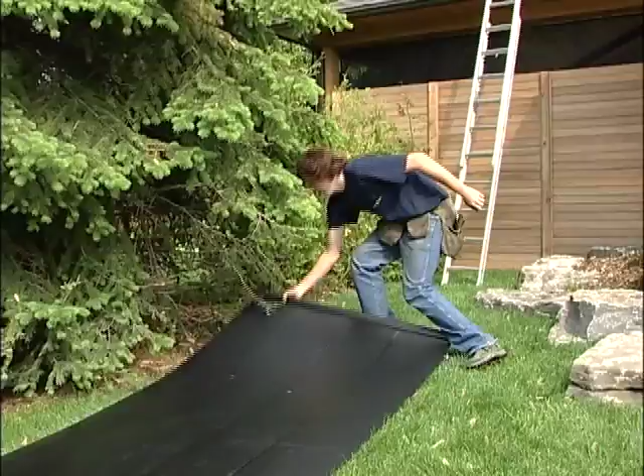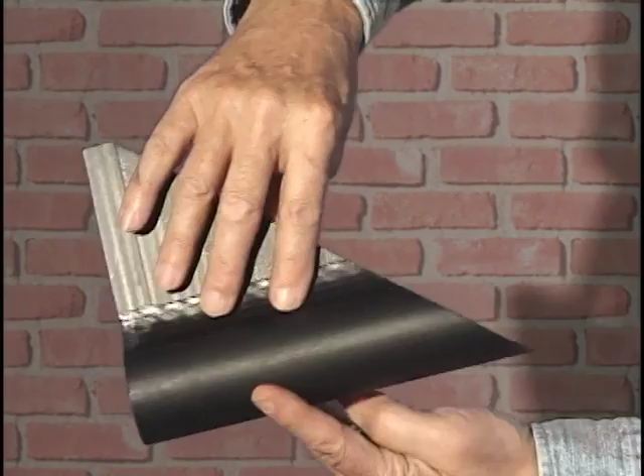The Techno-Solis solar pool heating system includes three basic components. First, the Techno-Solis solar panels, which are the key components of the solar pool heating system. They absorb solar energy effectively and transfer this energy to the pool water circulating inside. They are made of a 1/4 inch thick polypropylene sheet with 104 internal channels. The absorber is welded to two pipes made of the same material, the headers.

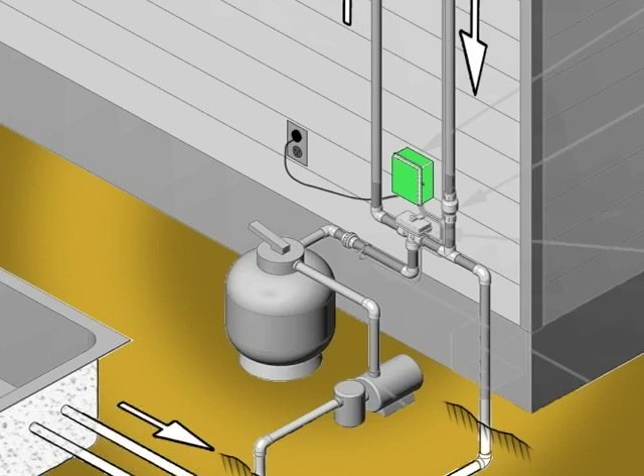Second, the automatic control compares pool water temperature to the ambient temperature on the roof near the solar panels. It will turn the solar pool heating system on or off depending on the availability of solar energy. The solar pool heating system operates with either an automatic or manual control. And third, the existing pump and filter, which enable the filtered water to circulate in the solar panels.

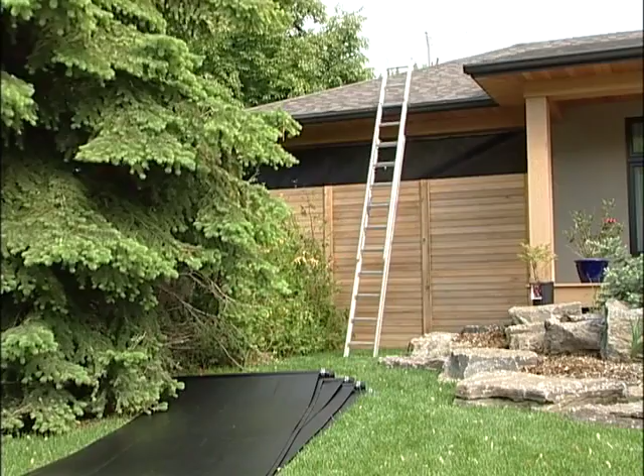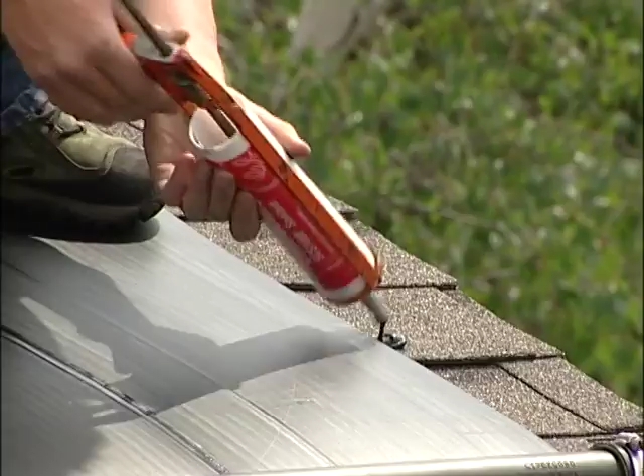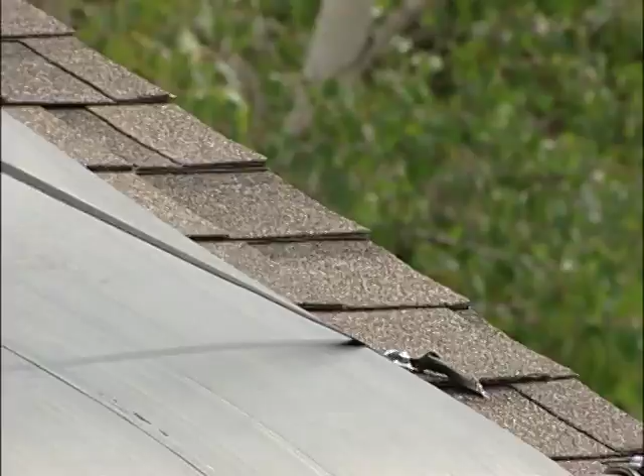Here are the tools and accessories needed to install the Techno-Solis solar pool heating system. A ladder, an elastic band to attach the ladder, a battery-powered drill, a 5/16 inch drill bit, a caulking gun, a 5/16 inch socket head screwdriver for gear clamps, a 3/8 inch socket head screwdriver for lag screws, a pipe cutter or hacksaw,

a knife, a wire stripper, a Phillips screwdriver, a level, a tape measure, pliers, a 3/16 inch concrete bit, and some Teflon.

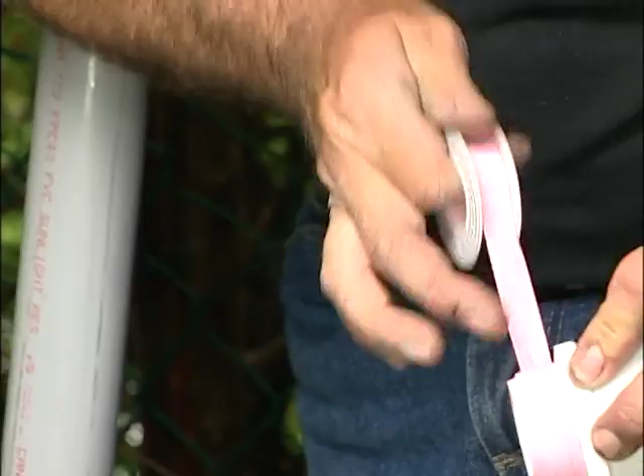Place the rough side of the solar panel's longitudinal weldings against the roof. On the ground, prior to lifting the solar panels onto the roof, install an EPDM hose and two gear clamps on the right side of the top and bottom headers of each panel. Do not over-tighten the gear clamps, as it could cause the open end of the header to collapse.

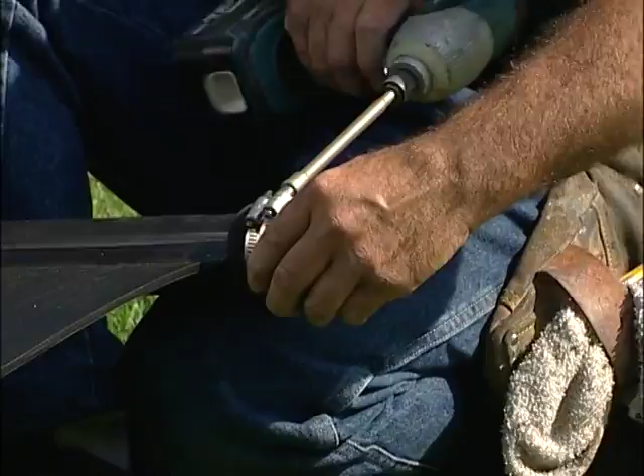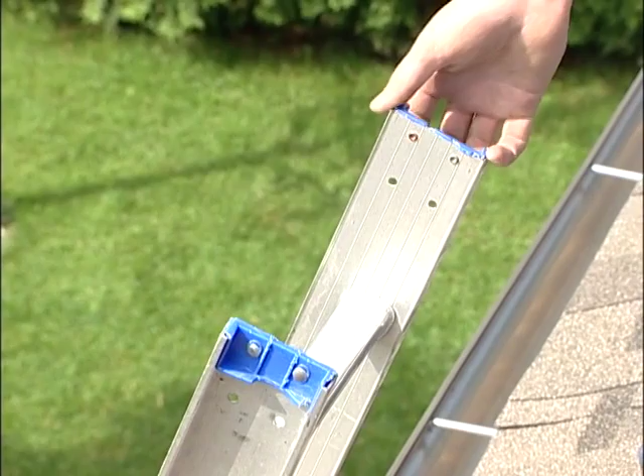Place the ladder level and secure it to the gutter with an elastic band. Although the Techno-Solis solar panels are made with a resistant plastic material, it is important to prevent all contact with sharp or cutting objects. In order to lift the panels to the roof, slide them up on the ladder.

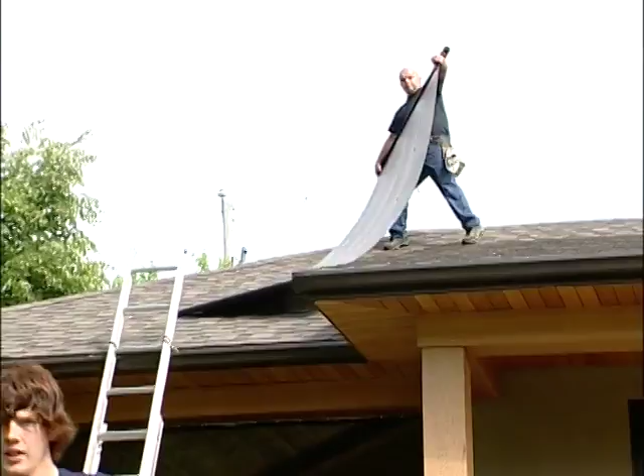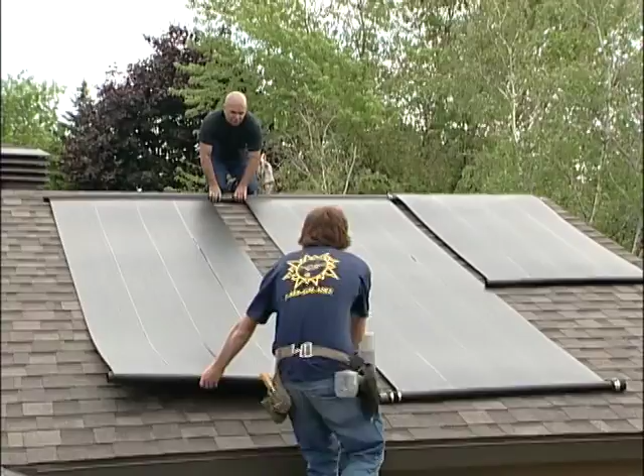Once on the roof, place panels side by side. Insert the header of the first solar panel in the EPDM hose of the second panel and tighten the gear clamp. Repeat the same procedure for the other solar panels.

Solar panels are installed on a slope, flowing downwards towards the supply pipe, therefore ensuring drainage and optimal protection against damage caused by freezing. The slope is 1 inch for 10 feet, or 25 millimeters for 3 meters. When the solar panel assembly is completed, anchor it to the roof.

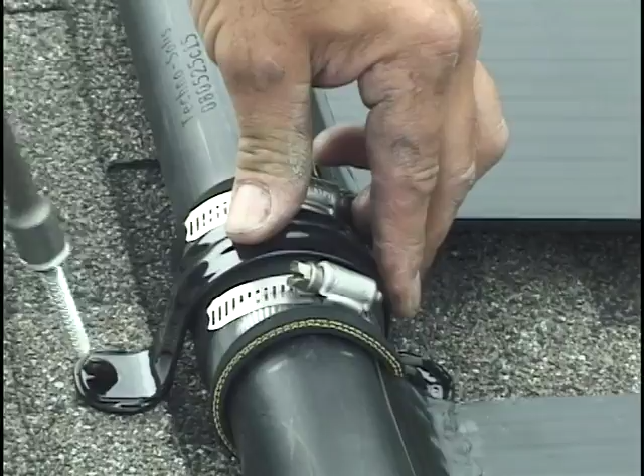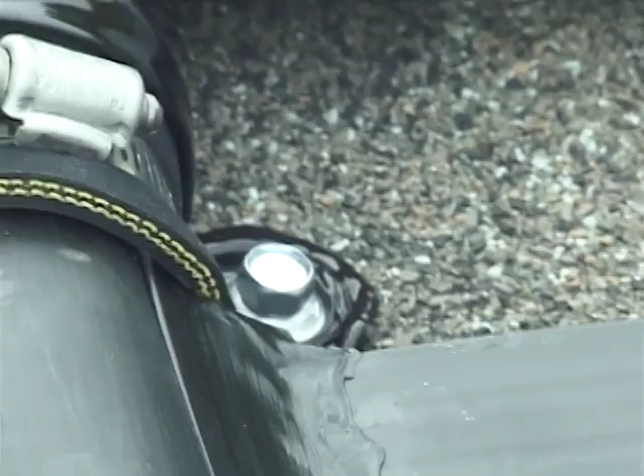Place a generous amount of caulking under the U steel supports. These supports are used to hold the solar panel's weight against slippage. Anchor the support to the roof using 2 lag screws with washers. Install a U steel support between each panel on the EPDM hose of the top header only.

Anchor all other EPDM hoses of the top header with a U steel support by repeating the same procedure. It's very important to remember, only the top header of the array is anchored to the roof.

For the 4-foot by 10-foot Techno-Solis solar panels, install 3 mounting straps horizontally. For 4-foot by 12-foot panels, 4 straps are required. These straps are used to hold the solar panels to the roof. Install a mounting strap 12 inches, or 300 millimeters, above the bottom header. The second mounting strap is installed 18 inches, or 450 millimeters, below the top header.

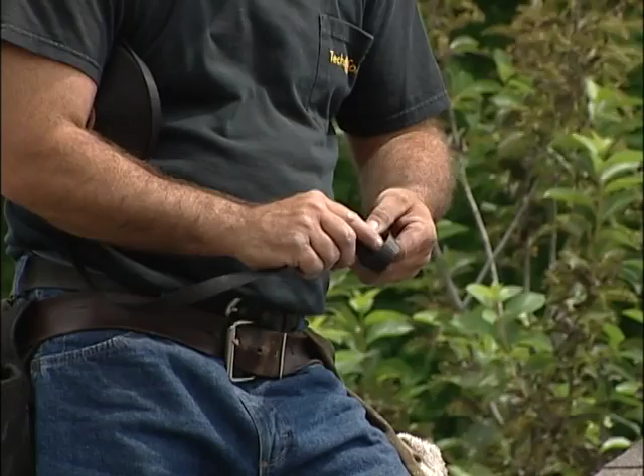The third and fourth straps, if applicable, are installed at equal distances between the 2 other straps. Make a knot at the end of the mounting strap. On either side of the solar panel array, apply a generous amount of caulking where the mounting strap is to be anchored. On one side, insert a lag screw with a washer in the strap and anchor it to the roof.

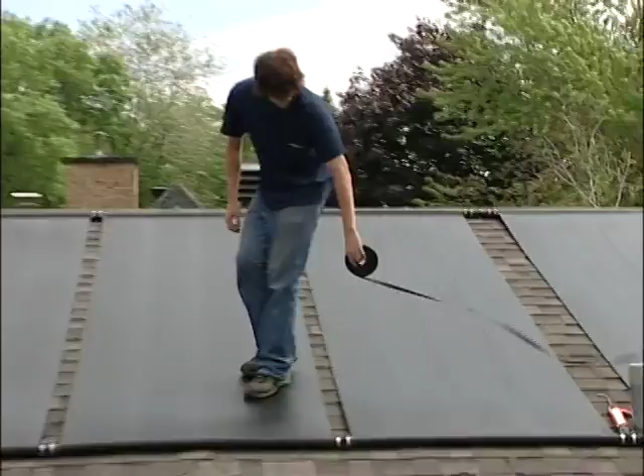Unwind the mounting strap over the solar panel array. On the other side, stretch the strap and anchor it using a lag screw with a washer. Cut the strap and make a knot on the end. Place other mounting straps using the same procedure. To anchor mounting straps between each solar panel, apply a sufficient amount of caulking and anchor them using lag screws with washers.

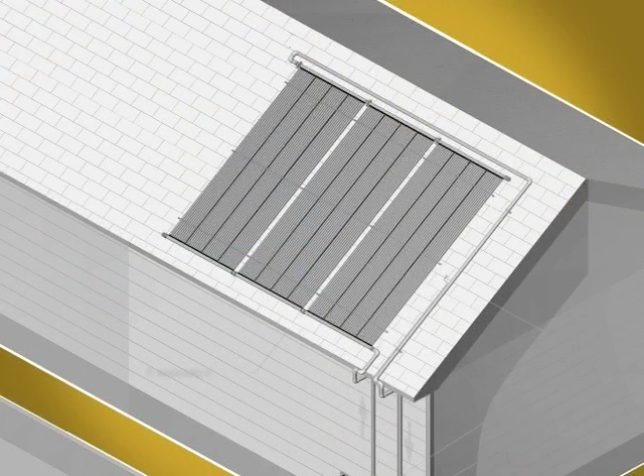Always connect the solar panel array assembly in reverse return. This assures that water flows through all the panels evenly. A feed and return on the same side of the solar panel array seriously reduces the efficiency of the system.

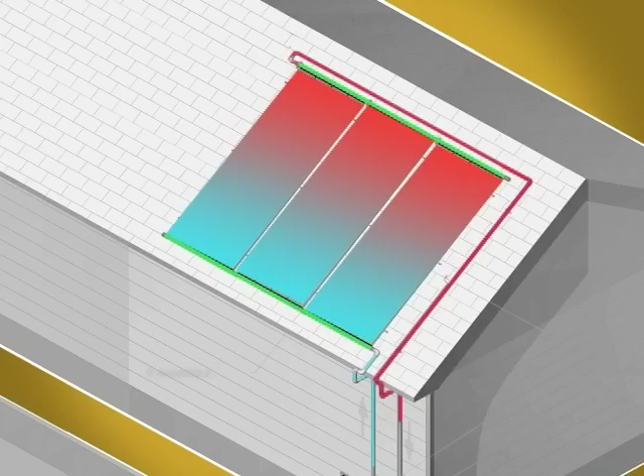Feed the water in at the lowest point in the system and connect the return line from all panels to the highest point in the system. End caps are installed on the open ends of the top and bottom headers.

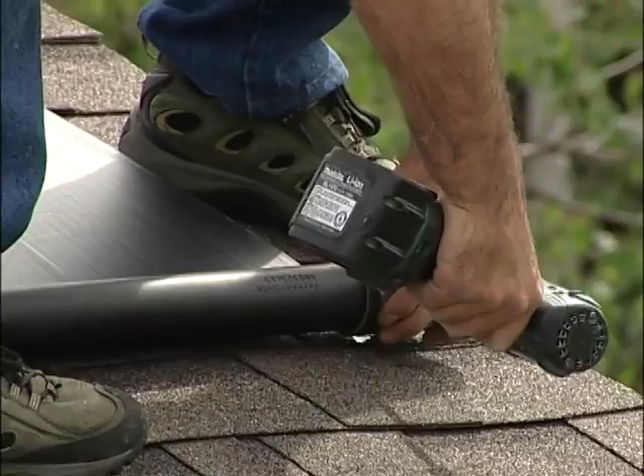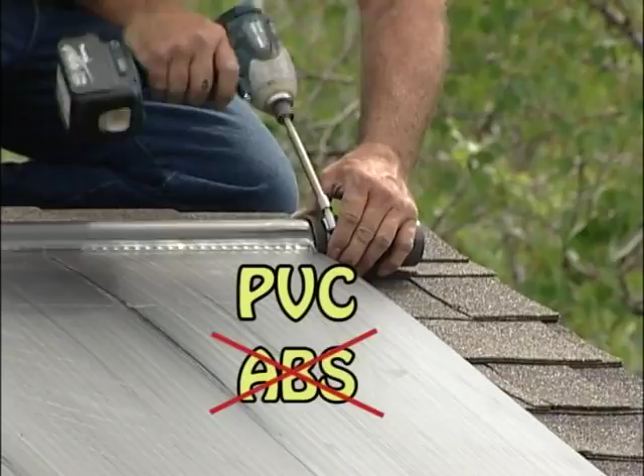The return pipe is connected to the panel array using a grooved PVC pipe-to-panel adapter. Only use PVC pipes. Black ABS piping degrades when exposed to sunlight. The feed pipe is also connected to the panel array using a grooved adapter.

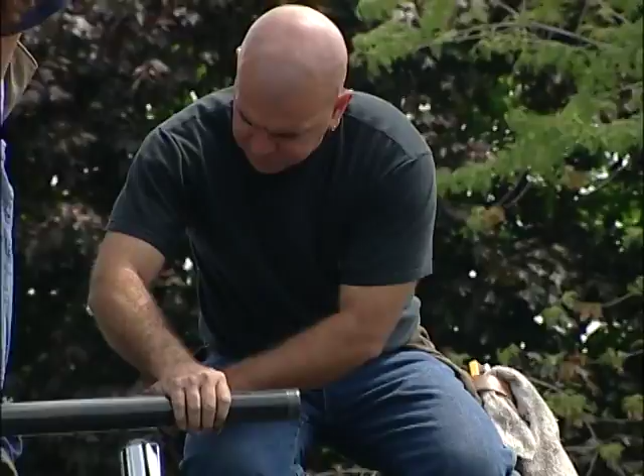Install the return pipe above the solar panel array. All pipes must be installed with a continuous slope of 1 inch for 10 feet, or 25 millimeters for 3 meters, in the direction of the filter for proper drainage when winterizing the solar pool heating system.

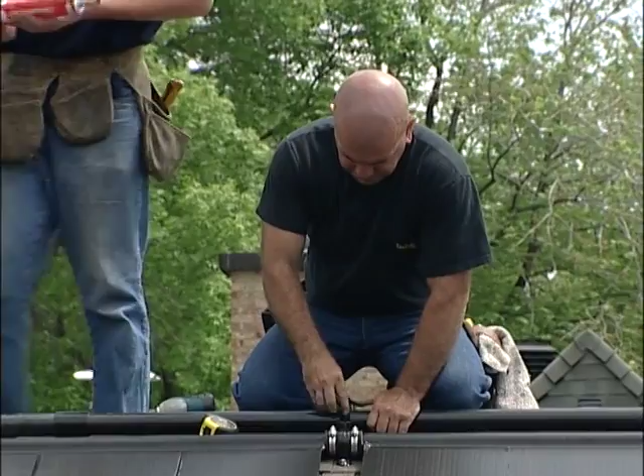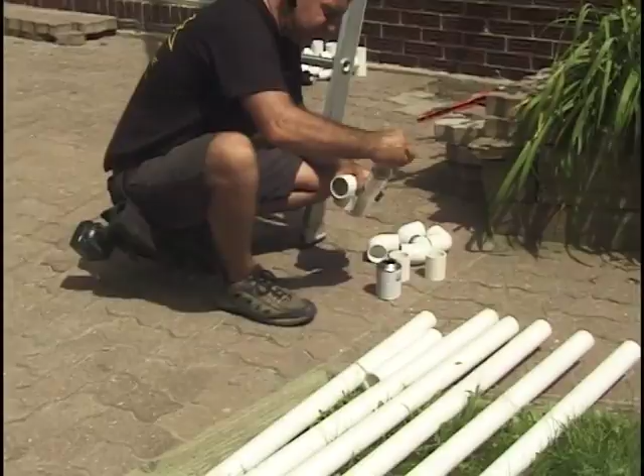Use a U steel support to hold pipes to the roof, and always apply a sufficient amount of caulking before anchoring them. Installing pipes on the wall of the house is quite simple. The solar panel's feed and return pipes are installed around the eaves rather than through the roof in order to avoid the risk of water infiltration.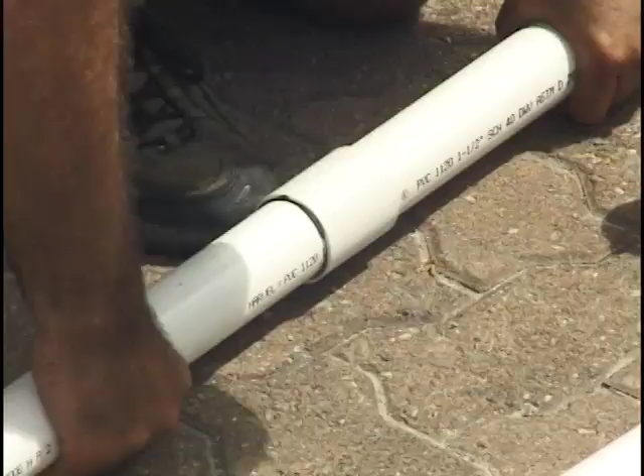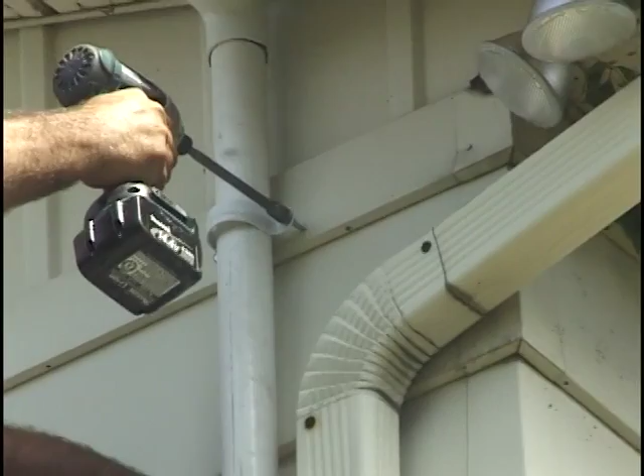Note that lettering on PVC piping is placed on the back of the pipe. During installation to the wall, lettering will not be visible. Once pipes are assembled, anchor them to the wall of the house, preferably along an existing gutter or hidden by a chimney. Use steel U-supports.

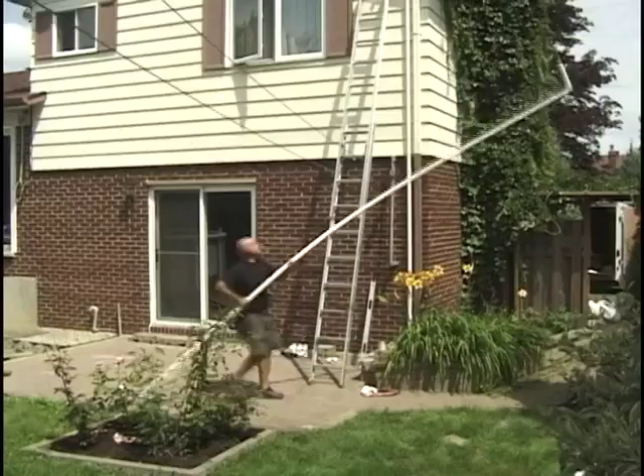Use a level to install the first pipe straight and anchor it. Install more steel supports every 5 feet, or 1.5 meters, to properly support the pipes. The second pipe will be installed parallel to the first one. Repeat the same procedure in order to anchor the supports to the other pipe. These two pipes are parallel.

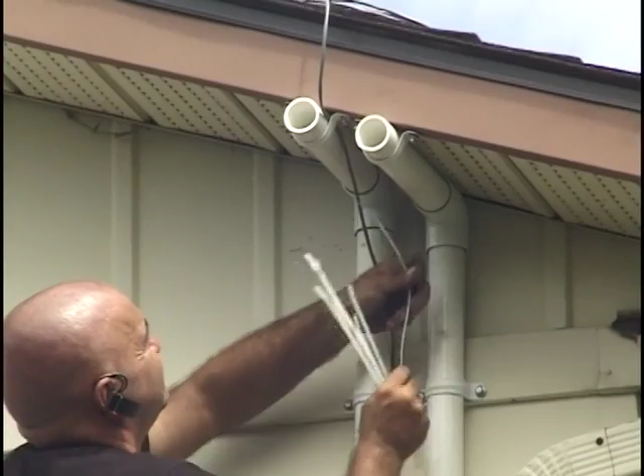On a brick wall, use a concrete bit to drill holes in order to install steel supports. Screw in the support. Run the roof sensor wire inside the pipe supports. Place excess wire on the roof. Add tie wraps to properly attach the sensor wire. Connect the roof pipes to the wall piping.

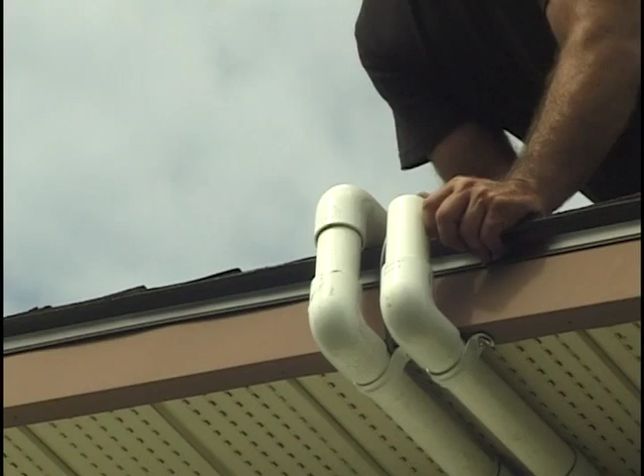Dig an 8-inch wide by 8-inch deep, or 20 centimeter by 20 centimeter, trench from the house where pipes come down from the roof and run to the filter. Mark with adhesive tape at both ends the feed pipe only. This will help avoid mixing up the pipes when connecting to the filter.

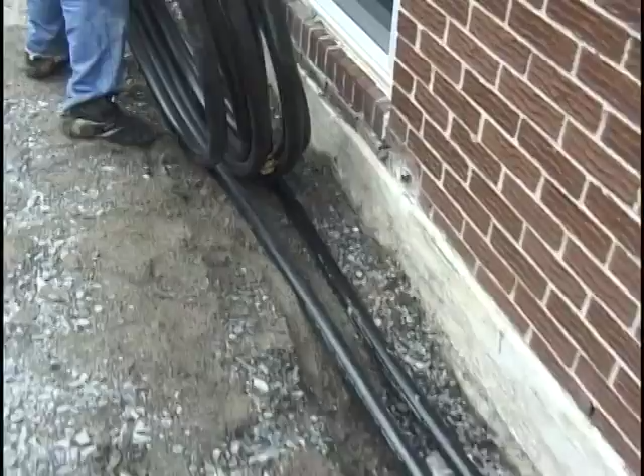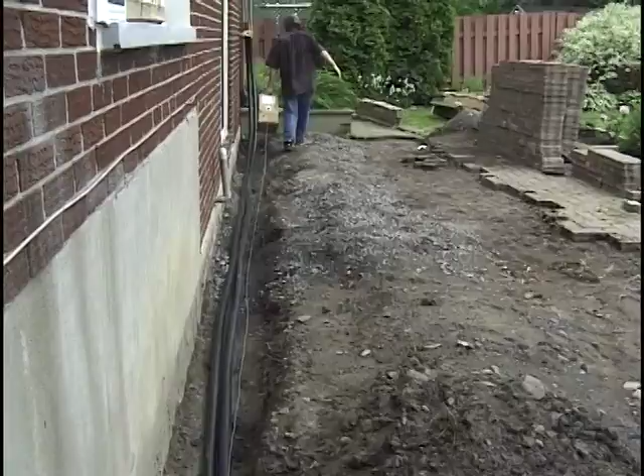For underground pipes, use flexible Corlon type pipes to connect the rigid PVC feed and return pipes of solar panels to the rigid PVC pipes around the filter. In the trench, add the wire for the roof sensor along with the 2 flexible pipes. Backfill the trench.

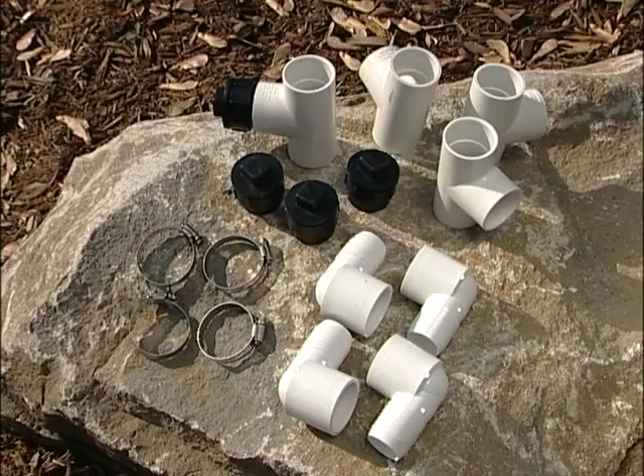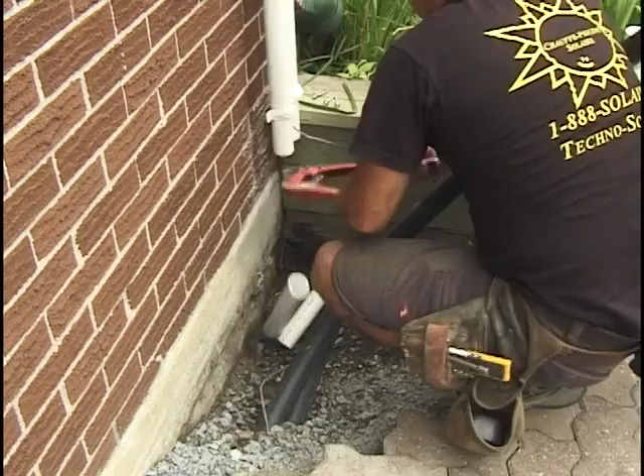An underground kit is used when the pool's pump and filter are far away from the solar pool heating system. For details on this kit, see the Assembly Kits menu. Cut the pipe to required lengths. Glue a T and use a piece of tube to properly align the T.

Connect the flexible tube to the rigid PVC tube with a 90-degree Corlon glued elbow. Tighten the gear clamp. Join the two pipes by firmly holding them for a few seconds while the glue sets.

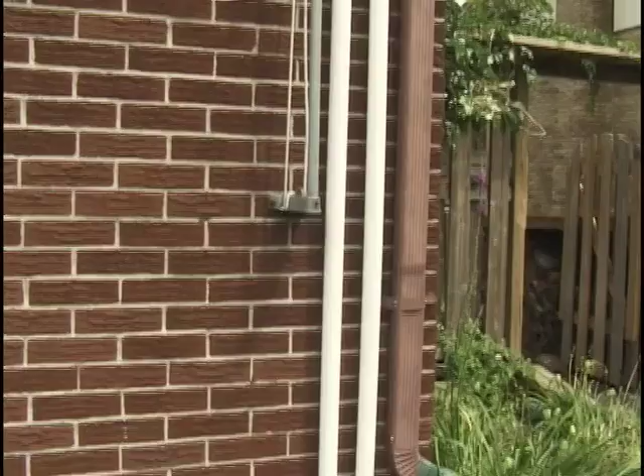Same procedure for the other pipe. Note that the adhesive marker tape is still in place. The underground pipes are ready to be backfilled. The underground kit transitions from the underground pipes to the pipes anchored on the house walls.

Determine the location where you will install the automatic control, taking into account access to the electrical power supply, accessibility for cutting the existing pipes around the filter, as well as the layout of the feed and return pipes from the solar panel array assembly. The automatic control turns the solar pool heating system on and off, depending on the solar energy available and the desired temperature of the pool water.

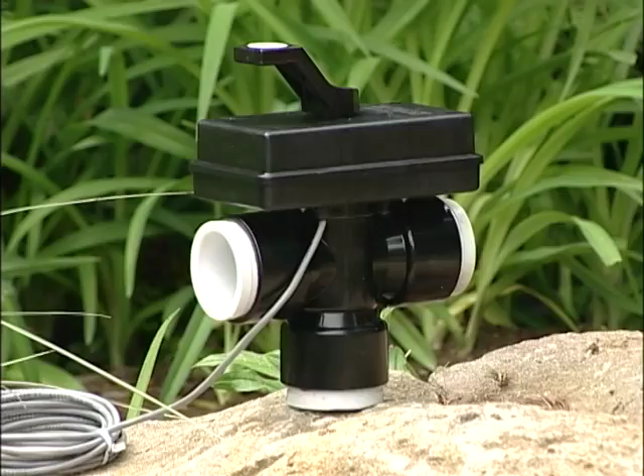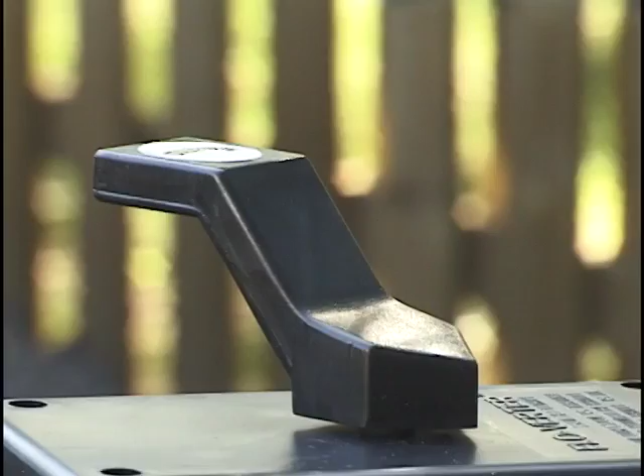The automatic control activates a three-way motorized valve which sends the water towards the solar panels or towards the pool. Install the automatic control in an area that is easily accessible, near the pump and existing pipes. The pump sucks water from the skimmer and drain of the pool. It moves the water towards the filter and returns it to the pool.

The motorized three-way valve is installed after the filter so that the water, heated by the solar panels, can return directly into the pool. Once you have determined the required space for the three-way valve, cut the required length from the existing pipes. Use a male adapter for PVC pipes. Always cover threads with Teflon tape to avoid leaks.

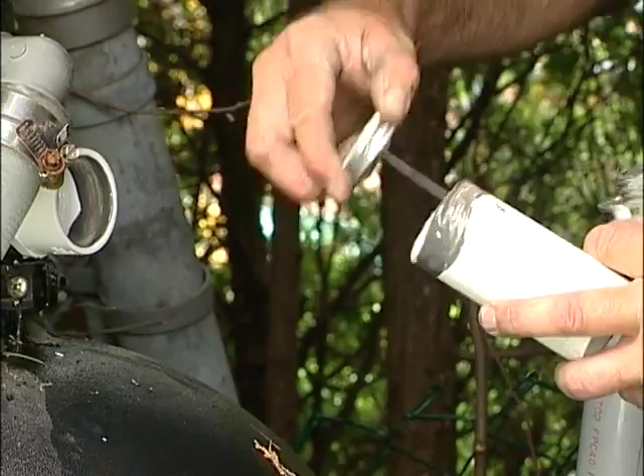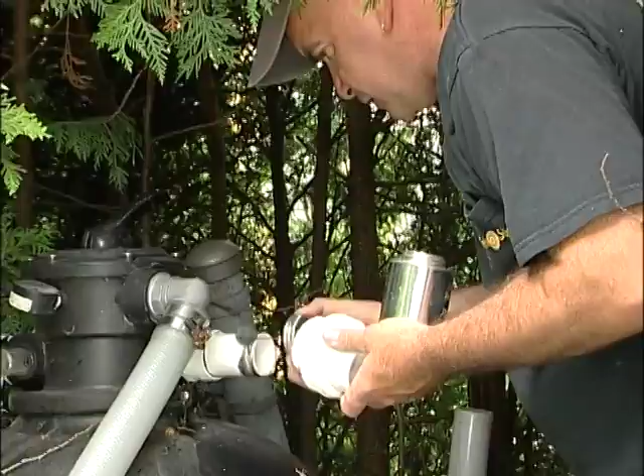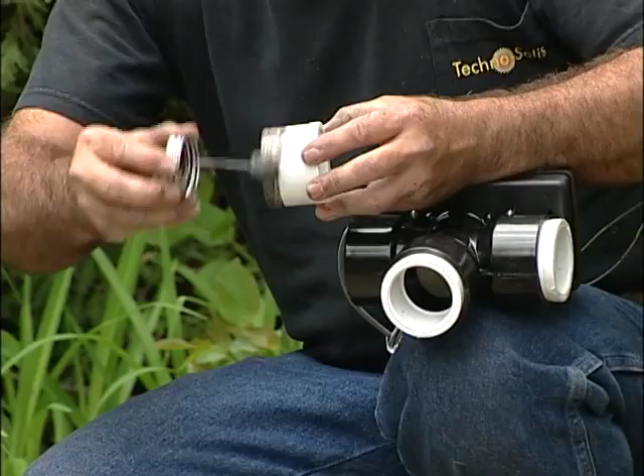Install a PVC union for ease of handling the filter's head when changing the sand. Glue the 3 PVC reducing bushings into the three-way valve. Glue the three-way valve to the filter outlet.

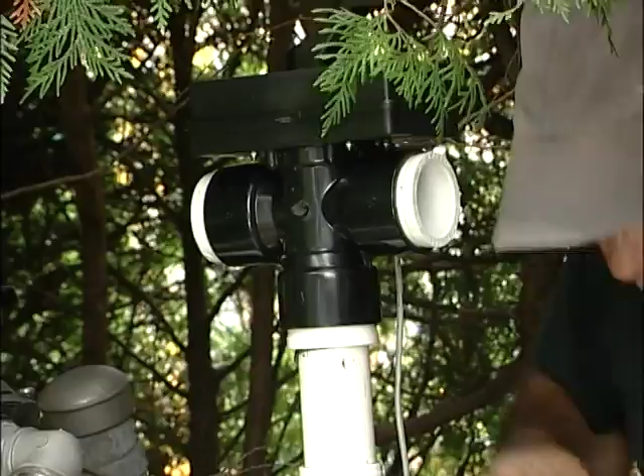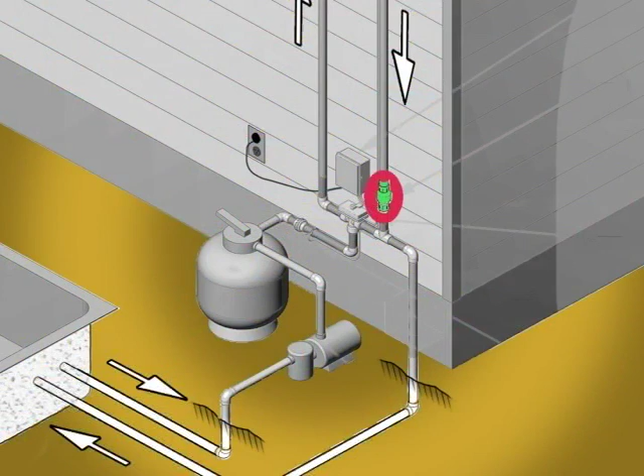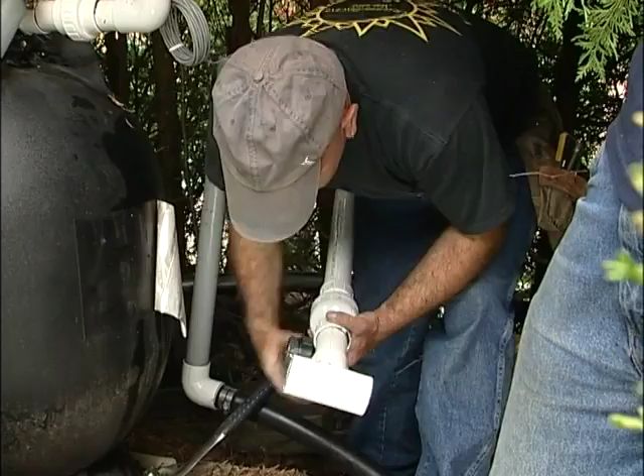When installing the check valve, drill a 1/8 inch diameter hole through the flapper inside the valve, enabling a complete drainage of the solar pool heating system for the winter season. Please note the arrow on the check valve body which indicates the direction of water circulation. Install an underground kit which includes a T and a cleanout. Glue the solar panel return pipe to the existing pipe.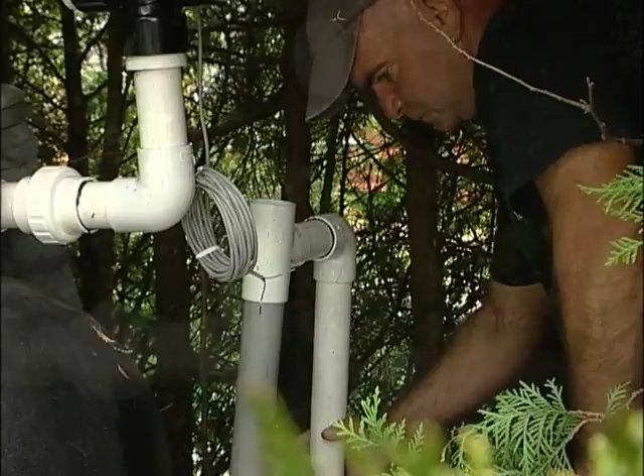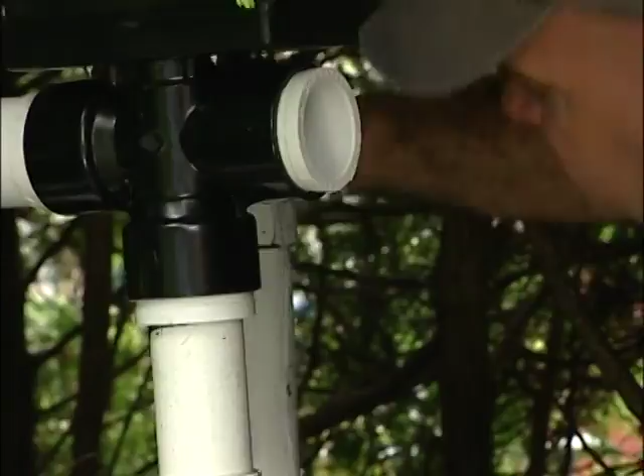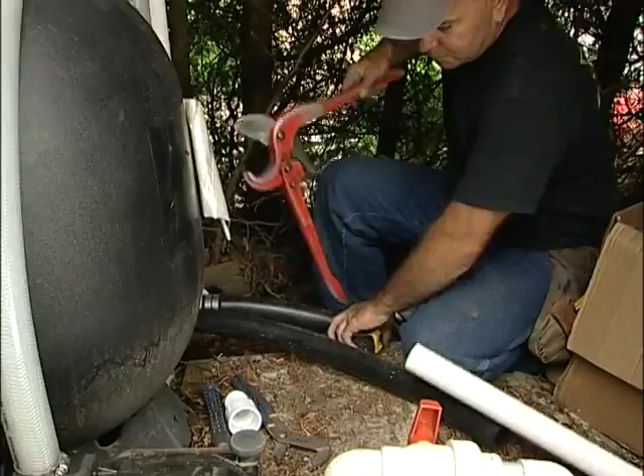Glue one side of the three-way motorized valve to the pool's return pipe. Then, connect the other side of the valve to the solar panel supply pipe. Use a butane torch for easier handling of the flexible pipes, if necessary.

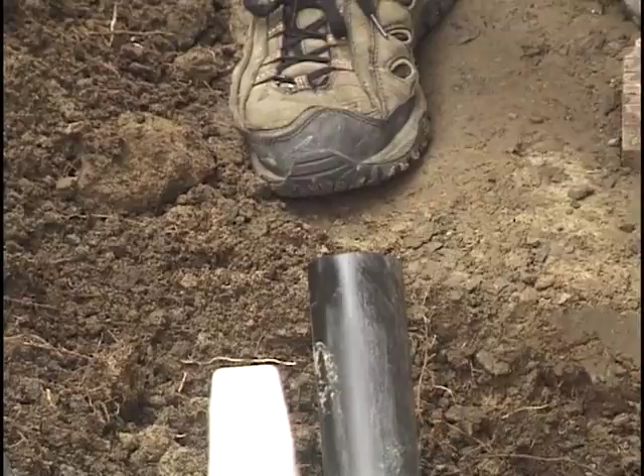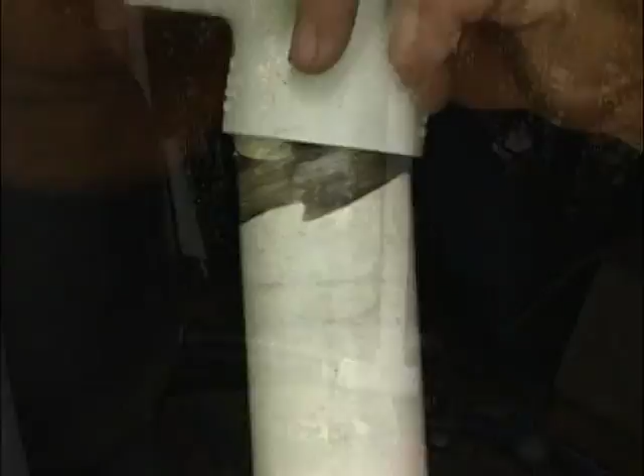Insert another Corlon PVC adapter to connect the flexible pipes to the rigid PVC pipes. Tighten the gear clamps. Glue the T and the cleanout. Finally, connect the piping to the motorized three-way valve.

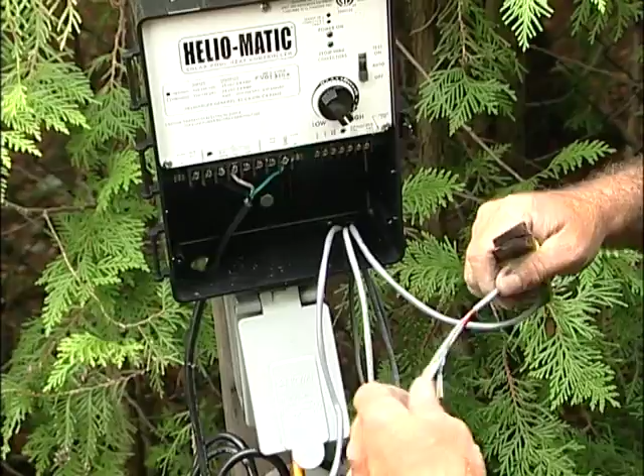Install the automatic control box on a piece of wood, on the wall of a garden shed or on a fence post, near an electrical power supply outlet. The control box is waterproof and weather resistant. Use number 218 shielded wire for all connections. Connect the roof's sensor wire to the automatic control. Connect the pool's sensor wire to the automatic control.

Connect the three-way motorized valve to the automatic control. Follow the color coding specified on the control panel. Reverse red and green colored wires to change the motorized valve's logic if necessary. All electrical connections are completed at the automatic control.

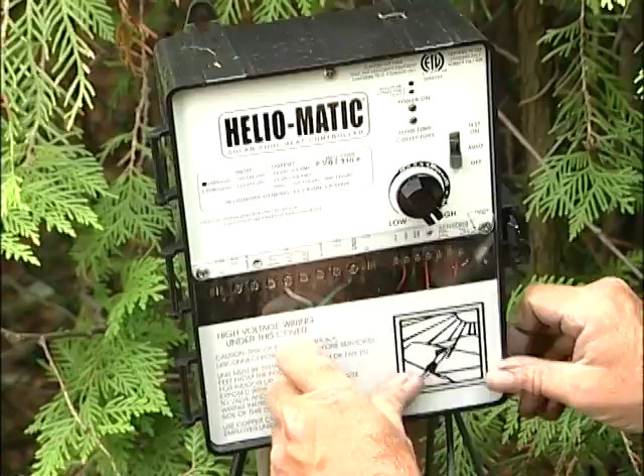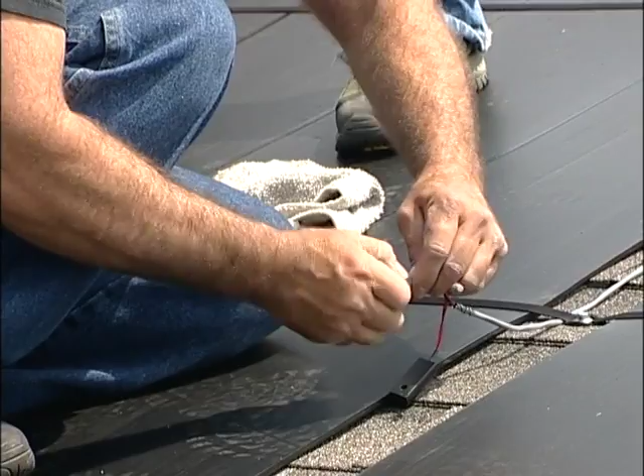Place the roof sensor between the first and second panel. The roof sensor takes the ambient temperature from the roof. Connect to the number 218 shielded wire using wire nuts. Make the connection weather resistant by packing a small amount of silicone caulking into the wire nuts. Apply a sufficient amount of caulking under the roof sensor. Screw into the roof.

Attach the sensor wire to the panel return pipe all the way to the automatic control box using tie wraps. Drill a 5/16 inch hole in the pipe between the filter and the three-way motorized valve. Insert the pool sensor. Do not over-tighten the gear clamp to avoid damaging the O-ring between the sensor and the pipe.

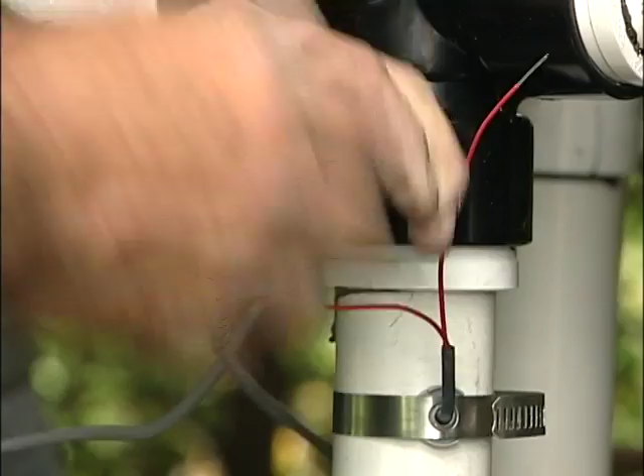Connection of the wire to the pool sensor is done using wire nuts. Make the connection weather resistant by packing a small amount of silicone caulking into the wire nuts. This completes the installation of the TechnoSolis solar pool heating system. Now you and your loved ones can relax and enjoy the solar heated pool. After a few days of use, you will see evidence of the performance of the TechnoSolis solar pool heater.